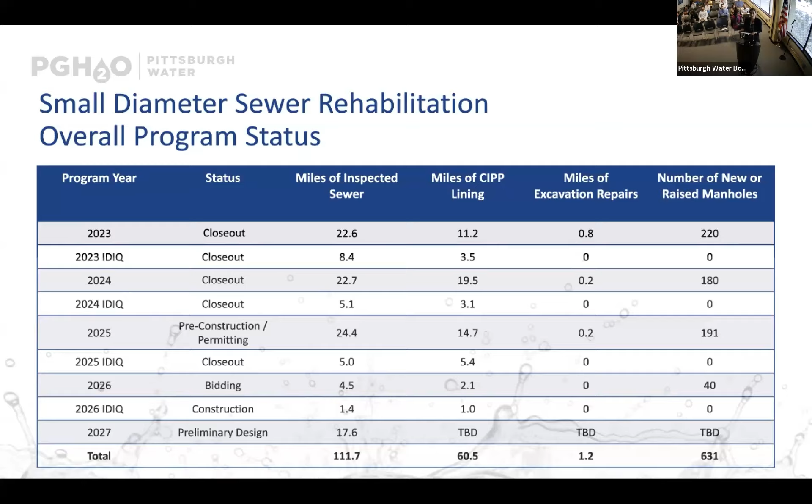The selection of our defined sites for the program is currently based on several factors, including inspection status, CCTV, previous repairs, and customer complaint history. Other factors we take into account include the neighborhood's EPA Environmental Justice Index rating, with a focus on areas with an index rating between 75 and 100%, areas that have high levels of inflow and infiltration, and the impact to other nearby utilities. Areas where there could be significant future projects to meet our future compliance goals are generally avoided, so that we're avoiding redundant work.

The curing of the lining temporarily releases small amounts of styrene, so we've recently prioritized styrene monitoring and increased our community outreach as a result. That communication includes door hangers with sewer lining information and anticipated work dates, robocalls to residents, community meetings, and street posters with links to additional information. We also have an updated website with details on the process and styrene. We've added continuous monitoring of styrene levels during the lining work, and our CMCI firms, our construction inspection firms, will have handheld monitors on site to verify readings when responding to complaints. Additionally, all our inspectors will go through styrene response training.

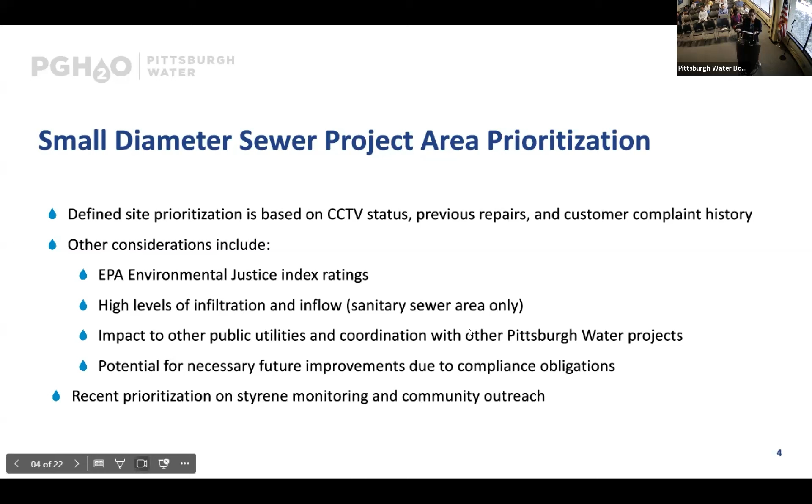Several of our SDSR, small diameter sewer rehab projects, have utilized Alcosan's GROW program for funding. I'm having a little trouble advancing the slides. Oh, sorry — you're good, thank you.

That's Alcosan's Green Revitalization Of our Waterways, aka GROW funding. This funding is provided by Alcosan for source reduction projects in their partner communities and authorities. Parts of our 2019, 2021, 22, and 23 rehab programs were awarded GROW funding, with allocation reimbursements ranging between 15 and 28% of the total construction cost. A total of $2.4 million in grant funding has been awarded through GROW. A portion of the 2027 contract is anticipated to be submitted for GROW consideration.

PENNVEST grants and loans have also been utilized for this program from 2020 onward. Since then, a total of $132 million has been awarded through PENNVEST. This figure does include the recent award announced this spring for the 2026, 27, and 28 programs.

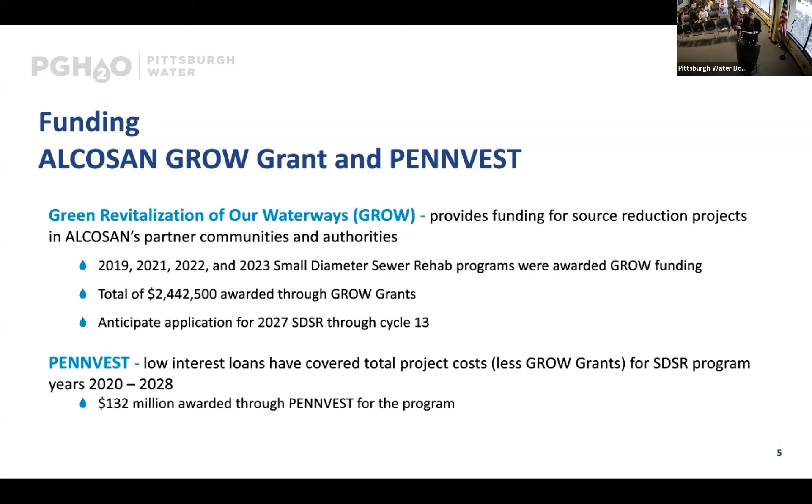The 2026 program used an in-house... I am trying to—thank you. I don't know if I'm pressing the wrong button or what.

The 2026 program used an in-house design approach for the Hazelwood neighborhood. This neighborhood was chosen due to its status as an environmental justice area and its inspection data. All components of the inspection and rehab design of this area were completed by Pittsburgh Water staff, including the inspection, review, and development of the design documents.

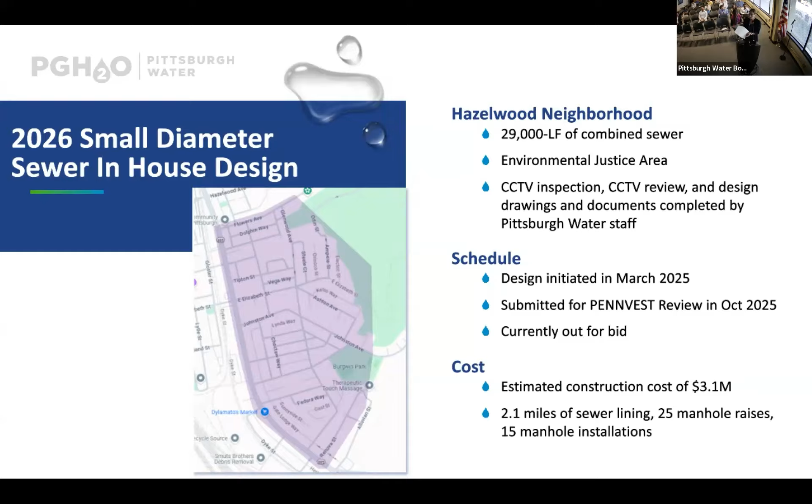The program started in March of 25, was submitted to PENNVEST last October, and is currently in the bidding phase with an estimated construction cost of $3.1 million. This effort increased our staff awareness of the design challenges and also created some really successful collaboration connections among our various departments, including engineering, operations, compliance, and GIS.

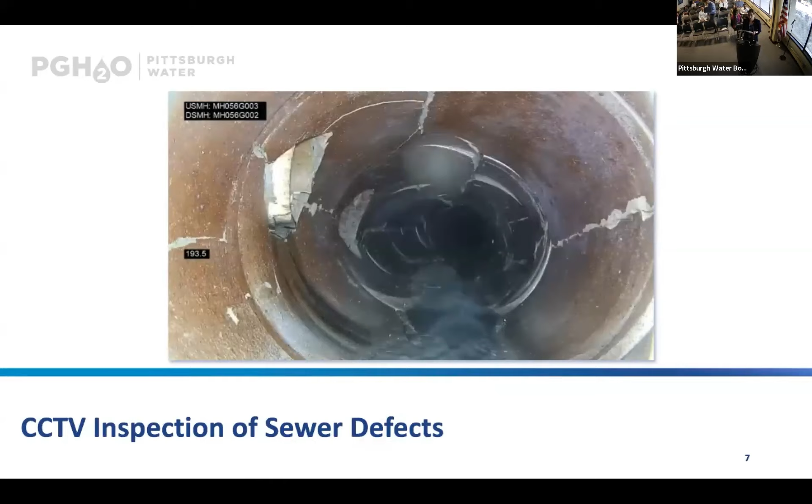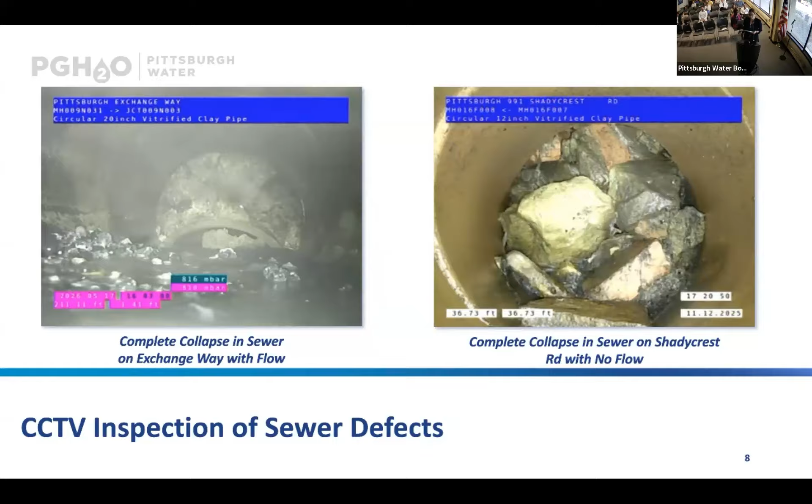So moving forward, I do have some photos for you. This example defect was captured with CCTV inspection, showing a pipe fracture on Glenwood Avenue in Hazelwood that will be rehabbed in our 2026 program. Shown here are pipe collapse examples on Exchange Way and Shadycrest Road in the Strip District and Beechview respectively. Other defects can include utility line penetration, offset pipe joints, and broken pipe walls.

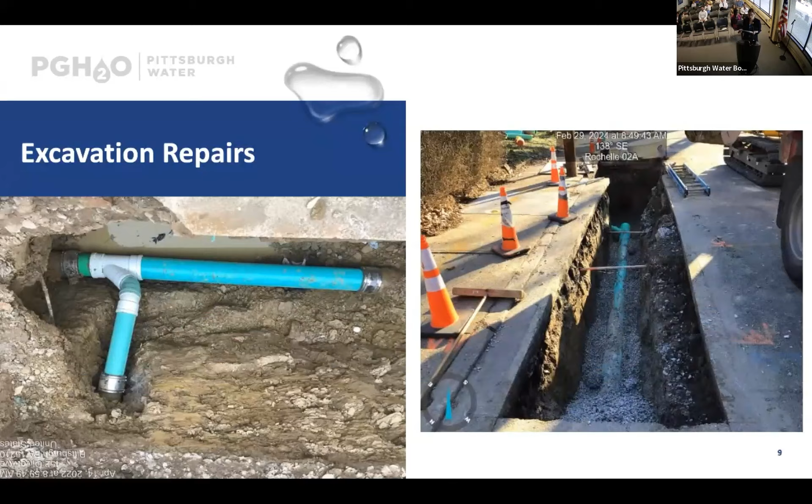Today I also have a visual aid, a portion of a cured piece of pipe lining. It was sitting on the table on the side, and somebody may have thought it shouldn't have been there.

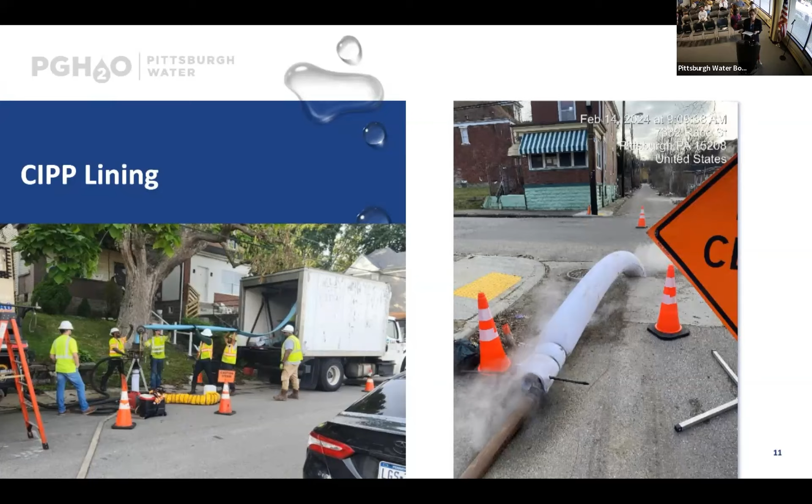Oh, thank you, Sandra. It's here. It's around, a little piece of white pipe floating around somewhere. If anyone's interested, you can see a visual of what that lining actually looks like. It basically becomes very rigid and forms a pipe within a pipe.

Moving on to updates on our water reliability plan. Construction progress is continuing in full force on the Aspinwall Pump Station, Bruecken Pump Station, and Clearwell Bypass Project, aka ABC, which is the largest project to date in the water reliability plan. These photos show the pouring of the concrete foundation for a future chemical building adjacent to the Aspinwall Pump Station that will be used to feed orthophosphate and fluoride.

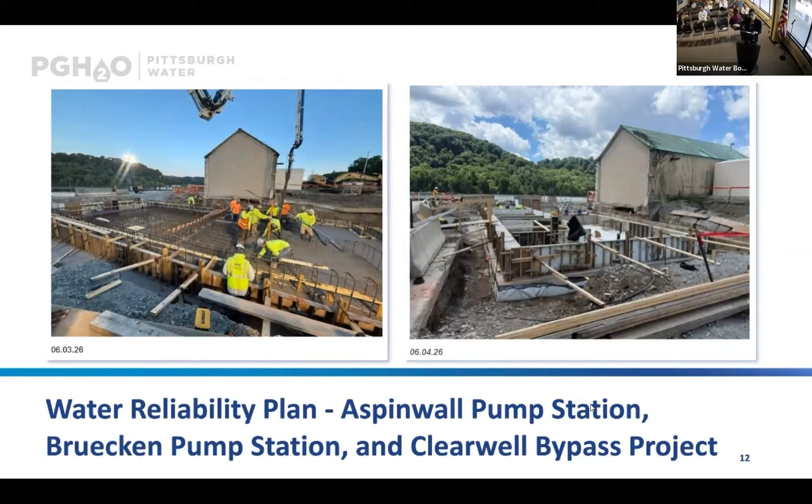In this next slide, on the left is electrical duct bank work in the basement of the Aspinwall Pump Station. And then we have an aerial view of that chemical building foundation construction that I mentioned earlier.

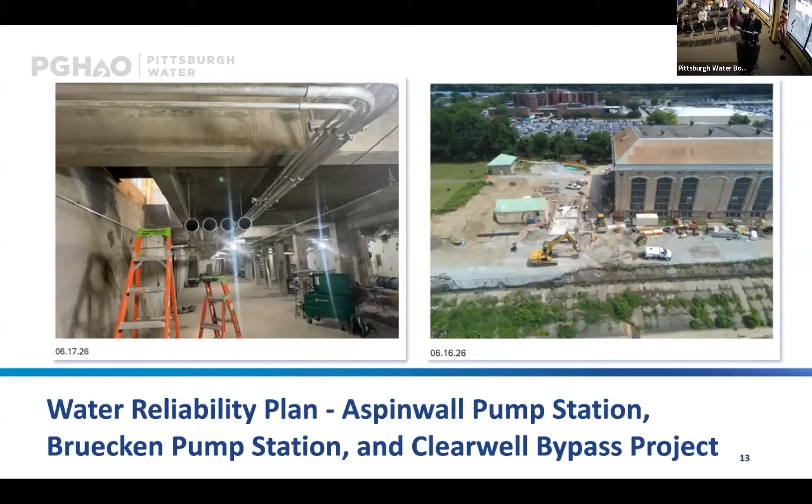These are views of the installation of the supportive excavation wall, in preparation for the construction of the foundation. Sorry, I'm in the wrong one. Yes, supportive excavation wall in preparation for the installation of the Clearwell bypass piping.

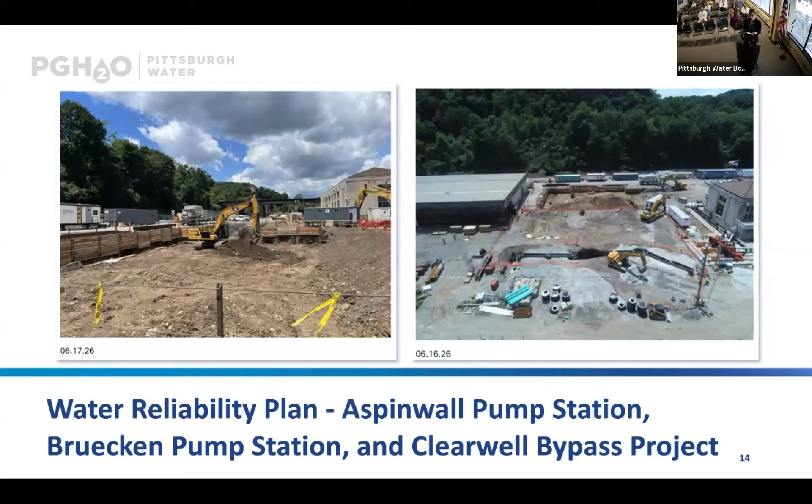Here we have views of the installation of another supportive excavation wall in preparation to construct the foundation of the future Washington Boulevard pump station that will replace the Bruecken pump station, which you can see in both photos on the right side.

And finally, on ABC, we have ground level and aerial views of preparing to construct the new Clearwell overflow vault adjacent to our outlet gatehouse. That will provide a method of overflowing the clear well when it is out of service.

That is my last slide for the moment, but I will be going back to slides shortly. Also in water reliability plan news, we did receive the DEP permit for the Aspinwall and Fox Chapel interim feed project, which will provide disinfection to Fox Chapel Authority, Waterworks Mall, and other large customers while that new clear well is constructed. Our consent decree now requires construction of this project within 3 years and 8 months of the permit.

Moving on to an update on our lead service line program, a total of 15,496 public and 11,915 private side lead service lines have been replaced through June 26th.

We currently have 12 active construction contracts that involve lead service line replacements in one form or another. These are a combination of small diameter water main replacements, neighborhood contracts, and urgent contracts. The work includes verification to identify the material of the service line, the lead service line replacement itself, water main replacements, and restoration of pavement and landscaping.

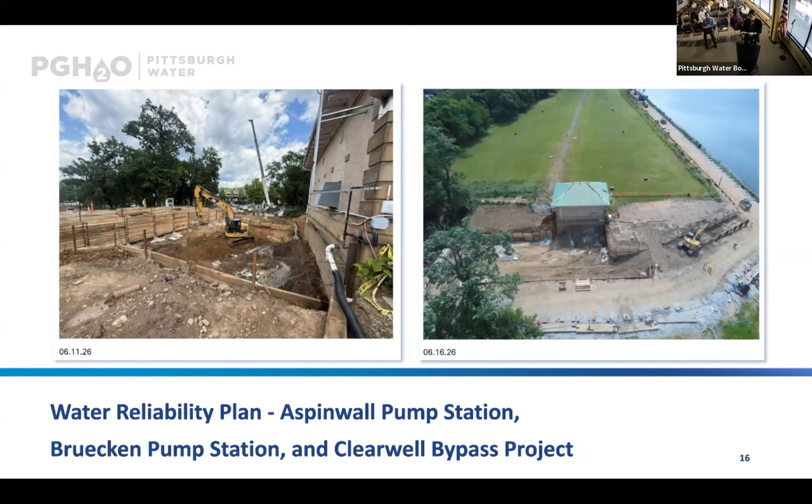Finally, for my report today, I would like to recognize engineering staff who were selected for technical presentations in the first half of 2026. At the PA-AWWA conference in early May, we had Sonia Sevilla, supported by Frank Sederi, reporting on how we will disinfect our water when the clear well is taken out of service. We also had Shannon Connell presenting on our lead service line termination program, a very interesting concept that underscores the complexity of our lead service line program.

In addition to just replacing service lines, we're also mandated by the PUC not to allow any partial lead service lines, meaning we cannot have either public or private lead under any circumstances. So if the private side has lead, we must get in touch with that customer and have them sign their agreement so that we can replace their service line at no cost to them.

And then finally, Dan Cleary presented on our large diameter water main replacement program at PA-AWWA, as well as at the 7th National Adaptation Forum in mid-May. This is held every two years in different locations throughout the country. It happened to be in Pittsburgh this year, and it focuses on taking action towards climate resiliency. Ryan Quinn presented on our Wightman Park Green Infrastructure project. That concludes my report, thank you for your attention.

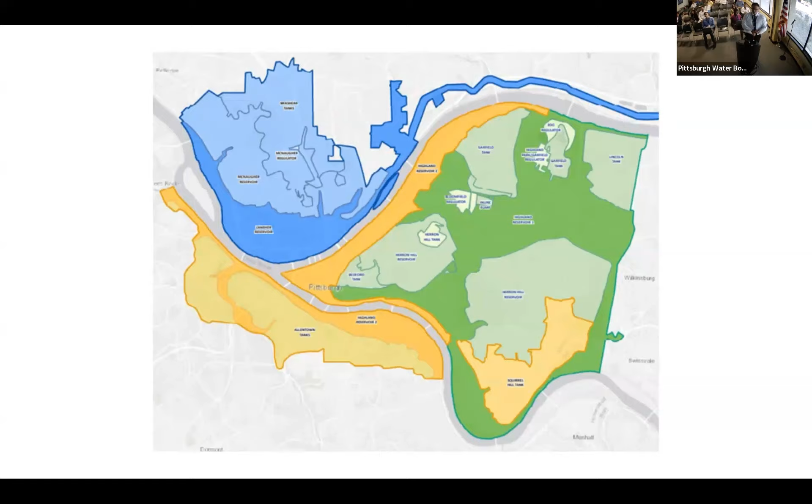We've talked a lot about our different service areas, and in particular our Highland 1 service area. So shown there on that map, hopefully everybody can see the outline of the city and the three rivers. The area shown in shades of green there is our Highland 1 super system, and it serves roughly a third of our service area.

This super system does include 3 secondary pump stations supplying 4 different water storage facilities. However, a large portion, shown in the dark green there, is directly served by pumping without a storage reservoir. This dark green area we currently pump from our Bruecken pump station up into this area, and those pumps at the Bruecken pump station feed that into that particular area there.

The recently constructed Highland Reservoir pump station plays a critical role in our water reliability plan when it eventually comes time for that clear well replacement that Rachel's been talking about. However, this pump station we've put into service also serves a very important role for our customers in the Highland 1 service area today.

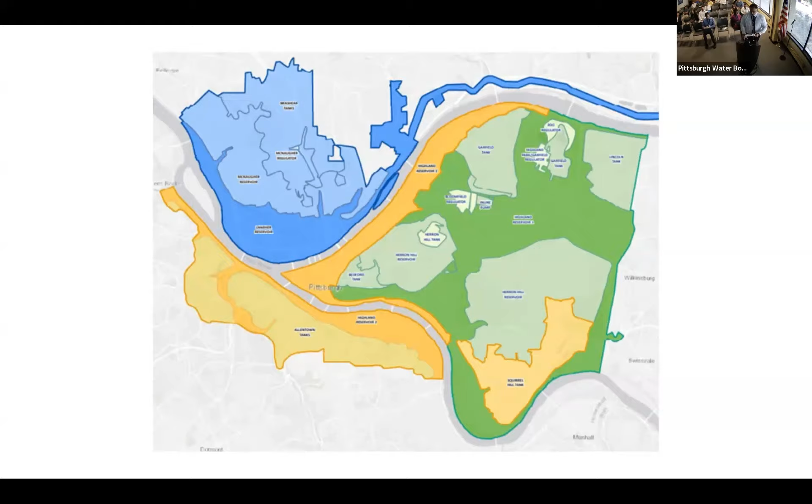Prior to implementation of pumping from the Highland Reservoir pump station, this area has been served by the constant speed pumps at the Bruecken pump station. Those constant speed pumps are designed to supply a constant volume of water into the system. However, if demand in the system was greater than that pump capacity, system pressures could fluctuate. So what I'm going to show you next is a couple of graphs relative to those pressure fluctuations.

This particular graph here, the blue line, is just a representation of pressure. This is over about a 1-week span, back in March, prior to us turning on the Highland Reservoir pump station. You can see here that blue line frequently moves up and down as the water use changes in that Highland 1 pressure zone, or as we turn on some of those 3 pump stations that feed off from it.

What would happen here is our customers in those areas, on a daily basis, could see pressure differences as much as 14 psi, or pounds per square inch, at their residence or at their building itself.

The new Highland Reservoir pump station has variable speed pumps, and this allows those pumps to respond to system demand and increase or decrease pumping rates automatically. So unlike the constant speed Bruecken pumps, the Highland Reservoir pump station is going to adjust to those system demands and change the amount of flow that it's putting out into the system.

This results in a more stable system pressure for our customers, and we've also been able to stabilize those pressures at the highest level that our system can accept.

The Highland 1 system still does not have a dedicated storage facility, so we do have to continually pump to maintain water supply to that dark green area there, the Highland 1 customers.

To improve system resiliency, this Highland Reservoir pump station has been constructed with automatic backup power to help us maintain system pressure if there is a power outage, since it is critical for us to maintain pumping.

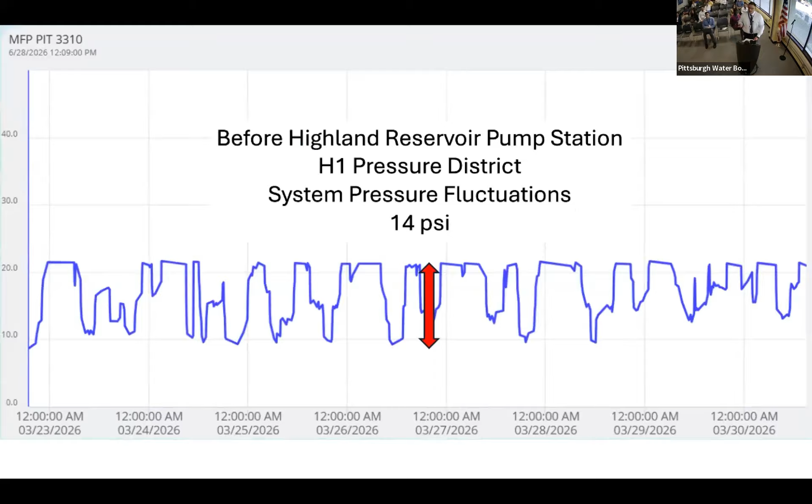So that was my two slides there. Again, here you can see that fluctuation is a lot narrower, and if I flip back and forth, you can kind of see the difference that our customers are experiencing. I just wanted to share that. This pump station itself is super important for the water reliability plan, and eventually as we get into clear well bypass, our customers are seeing good benefits from that right now.

Go one more. I think that'll end the slideshow. Perfect. All right, turning to the rest of my report.

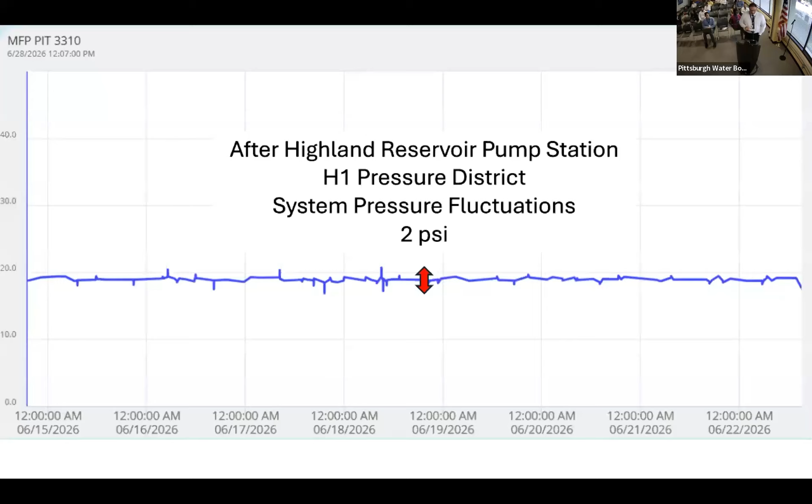Last week I had the opportunity, along with other Pittsburgh Water staff, to attend the AWWA, or American Water Works Association, annual conference in Washington, D.C. This conference always provides a great opportunity for Pittsburgh Water to showcase our work, learn from others, and also be recognized by our peers as a national leader in drinking water. And this year was no different.

Four highlights I wanted to share with you from the conference this year. First, I had the opportunity to present on replacing the 120-year-old Clearwell water quality considerations, where I was able to highlight the operational and compliance considerations we evaluated as we developed the new disinfection process, working through the design of that new Clearwell, the capstone to our water reliability plan project.

Secondly, we received national recognition of our water quality and treatment plant optimization, where our Senior Manager of Water Quality, Kevin Wood, accepted the AWWA Partnership for Safe Water Directors Award.

Our Chief Information and Performance Officer, Lee Haller, was able to sit in on a panel with other utility leaders to discuss strategies for managing AI-related operational, legal, and financial risks for utility systems.

And finally, Sarah Collins, our Manager of Talent Acquisition and Workforce Development, was the recipient of WaterNow's 2026 Emerging Leader Award for efforts to build an equitable, future-ready workforce in Pittsburgh by expanding access to meaningful careers in the water sector.

An example of that work, and we work with Sarah quite often on the operations side, was the creation of Pittsburgh Water's first apprenticeship program for stationary engineers, where we now have an apprentice stationary engineer working at the water treatment plant to begin developing that pipeline of workforce for us in the future.